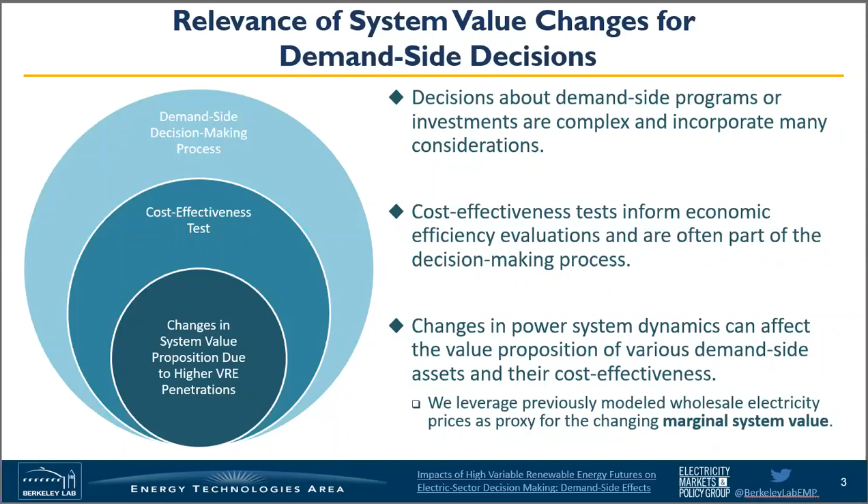And so we want to leverage our wholesale electricity price series as a proxy for marginal system value, and then see how growing levels of wind and solar change that marginal system value of various resources and what implications that then has about final investment decisions. The next slide is quite busy, a little complicated. It is a summary of the entire year 1 research. So I will not have time to go into detail here. You can look at the full technical report if you are interested in learning more about it.

But what we did was we looked at the year 2030, so only 10 years from now, and compared one scenario where we froze the wind and solar shares as they existed in the year 2016 and contrasted those with 3 high VRE scenarios. One that had a lot of wind, one that had a lot of solar, and one that was balanced with equal amounts of wind and solar. We looked at 4 different regions in the United States: the Southwest Power Pool, NYISO, an organized market in New York, CAISO in California, and ERCOT in Texas.

And while some of our findings varied quite a bit, depending on whether you're in a high solar or a high wind scenario, certain elements were similar in all 3 high VRE scenarios. On the one hand, we found that the average prices over the course of an entire year decrease with increasing renewable energy penetration, up to 40% in some instances. We also found that there is an increased frequency in those hours that have especially low electricity prices, under $5 or even $0. This was particularly true in ERCOT in Texas in the high solar scenario.

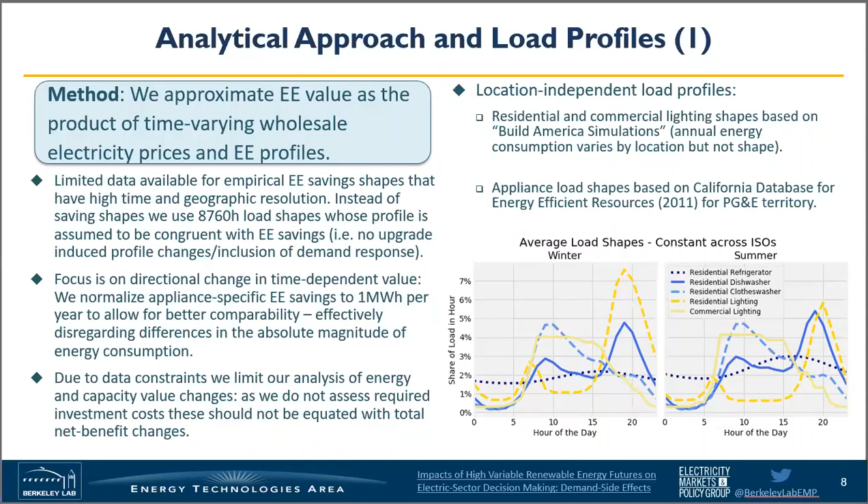We look at a couple of different measures. Here on the right side, I've shown some that we assume to be relatively constant throughout the country that do not vary by location. So we have residential refrigerator loads, dishwasher loads, clothes washer shapes, and residential lighting and commercial lighting shapes that we used from the California database for energy efficient resources and the Build America simulations.

Then we have some other energy efficiency measures that actually vary quite a bit depending on where you are in the country. And this is particularly true for HVAC loads that are driven by climatic differences. And so for each ISO, we use two candidate locations. In SPP, we are looking at Kansas City and Sioux Falls. In NYISO, we look at Buffalo and New York City. CAISO, we look at Bakersfield and San Francisco. And for ERCOT, we look at Dallas and El Paso. Now we know actually that El Paso is not part of ERCOT formally, but it is a nice representation of the climate system in the western parts of ERCOT, and thus we use it here.

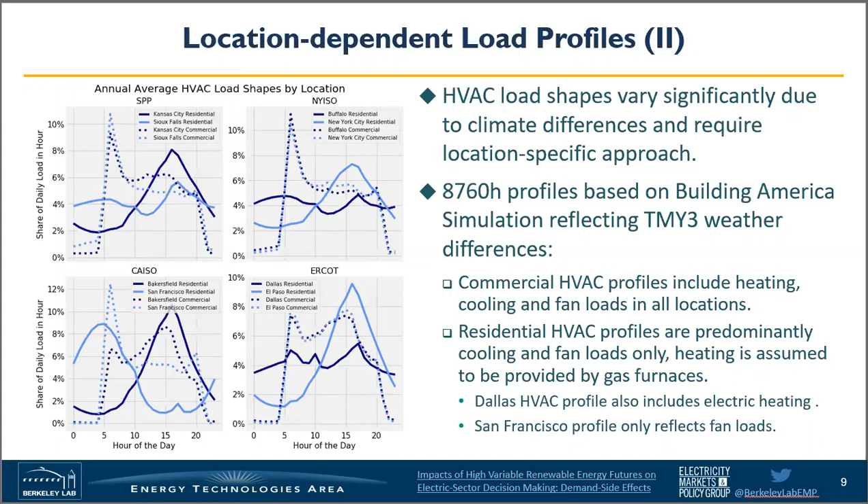So these are the underlying load shapes, which we assume to be EE saving shapes, and we will now combine them with the concurrent hourly energy and capacity values in order to then calculate the total energy efficiency value and see how those values change over the course of the year and between the different scenarios.

So slide number 10 now has a summary of that. This is quite a busy graph, so I want to orient you a little bit. We have our 4 ISOs, and then in the lines are the different measures. The x-axis is the total value in dollars per megawatt hour, so energy and capacity value.

And the red triangle represents the energy and capacity value in the low VRE scenario for a given measure in a given region. Now what you notice is that the other 3 dots, the yellow square that represents the high solar scenario, or the blue X that represents the high wind scenario, are often to the left of the red triangle, meaning that there is a decline in the total value of energy efficiency savings as defined by only energy and capacity value. So the total value declines, and that is actually strongly driven by a decline in the energy value component. Capacity value at times may even increase a little bit, but the energy value decreases are so large that the total value change is negative.

You will also notice that the magnitude of the value decline differs between both measures and regions. The value decline is the strongest in CAISO and in ERCOT, and there are some applications that see very little value change, for example, a residential dishwasher. And there are some others that see very big value declines, for example, commercial lighting in the high solar scenarios, where energy savings that occur during the middle of the day when electricity becomes relatively cheap because of high solar generation levels don't become as valuable anymore.

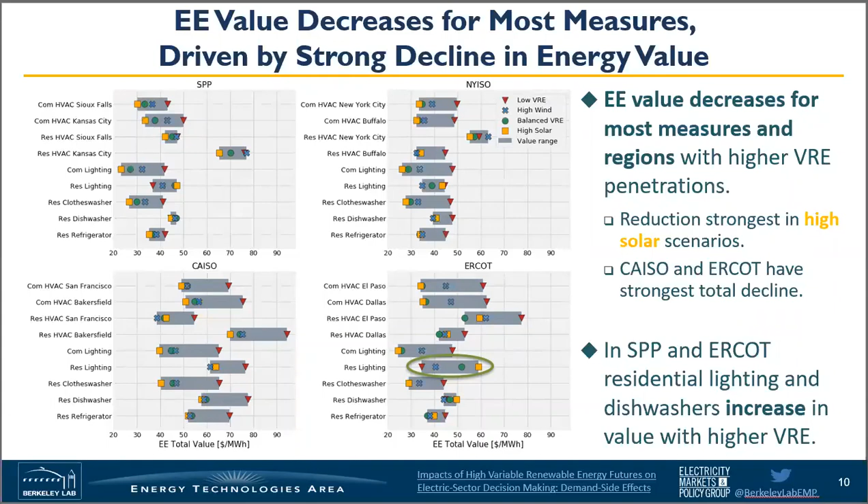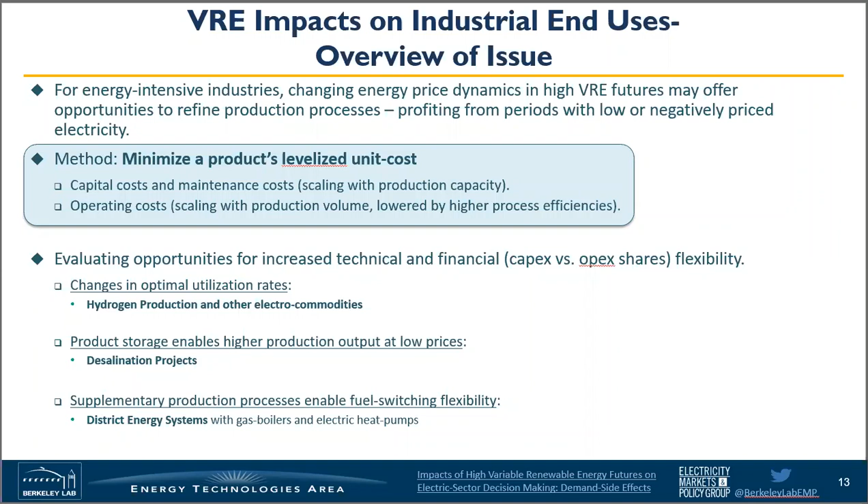So unfortunately, we won't be able to talk about that much here today, but I invite you to look at the report for more information. And with that, I want to now hand it over to Cody to talk us through the next set of examples. All right, thank you, Jo. Can we move on to slide 14, for those who are following along on the phone?

Thanks for highlighting some of the margins in which VRE price dynamics can affect decisions made by large energy consumers. Like Jo said, I'm going to talk in more detail about one of these margins, which is the opportunity for frequent periods of low electricity prices to affect how an end user trades off capital costs against operating costs. And so to address this first decision, we present a case study of power-to-hydrogen, which is currently a niche application due to high costs.

I'll note that while we study power-to-hydrogen specifically, we also generalize our results to other industrial commodities that require significant amounts of electricity, and those examples could include carbon fiber or desalinated water. And so what exactly do I mean by power-to-hydrogen? I suspect some of you may be familiar with the term, and it's an energy-intensive process in which an electric current is used to separate oxygen and hydrogen from water.

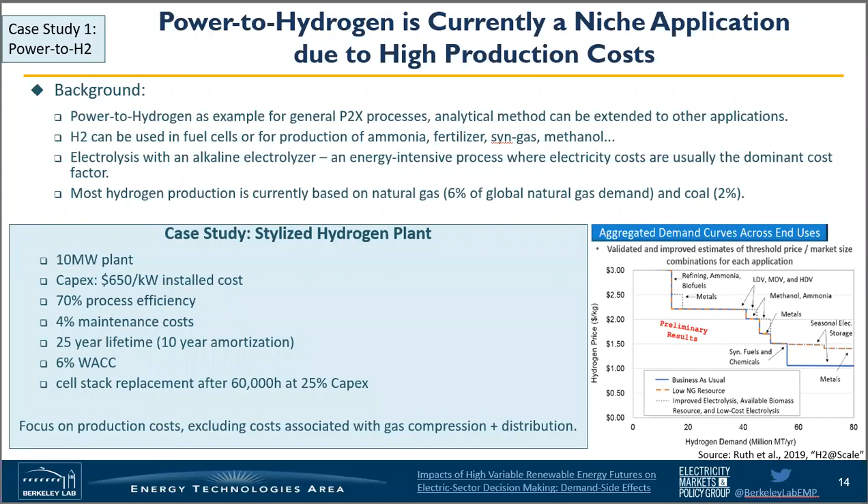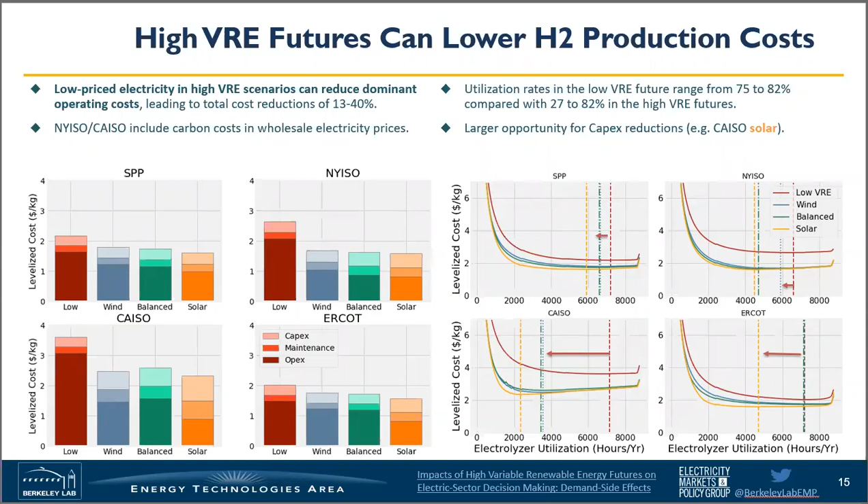And so I think an interesting takeaway here is that we see VRE price dynamics causing hydrogen producers to favor low capital cost technologies that are able to flexibly switch on and off. And now to slide 16.

And so while in the previous slide, we abstracted to an electro-commodity that might have different requirements for run times, now we're looking at, on this slide, how our results might change if we vary the upfront capital cost or the efficiency of a production process. And so this chart is a little complicated, but on the x-axis, we're looking at the upfront capital cost of the electro-commodity process, and then the upper and lower bounds of these red and green areas represent changes in the efficiency of the production process.

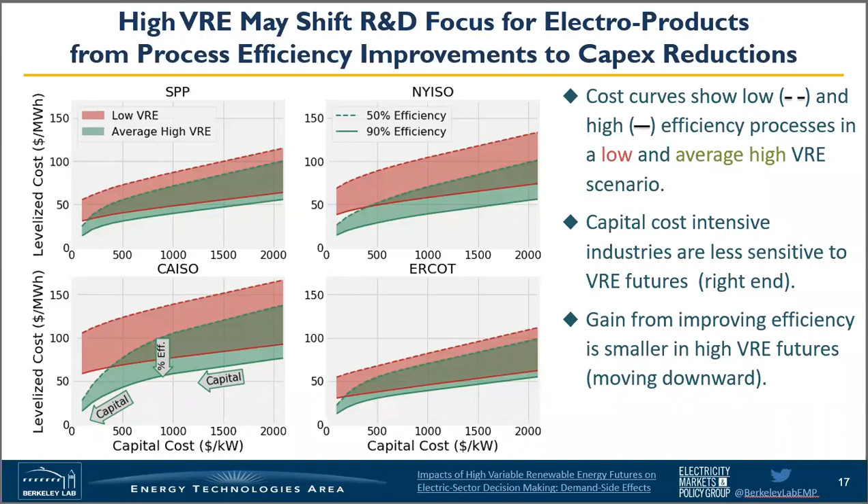All right, moving on to the next section, retail rate design. Now we're going to transition to our third long-lasting decision in the electricity sector, retail rate design. Okay, so in this context, we're going to ask, under different high VRE futures, how might regulated retail electricity rates further diverge from marginal cost and lead to market inefficiencies? And also, what new aspects should retail rate designers consider when drafting the next generation of rates?

And it's important to distinguish, as many of you know, that retail rate designers don't only think about electricity rates that are the most economically efficient. They also consider other worthy design principles like fairness, equity, simplicity, or customer acceptance of rates. And so really you can think of a rate design in terms of trade-offs between economic efficiency and other principles like simplicity.

And so a flat rate that provides the same rate per kilowatt-hour at all hours of the day might be really easy for a customer to understand and accept, but it might do a poor job of communicating the real-time constraints of the electric power system. And so on the other end of the spectrum are rates like time of use rates or real-time pricing, which are better approximations of system costs, but might be harder for customers to understand.

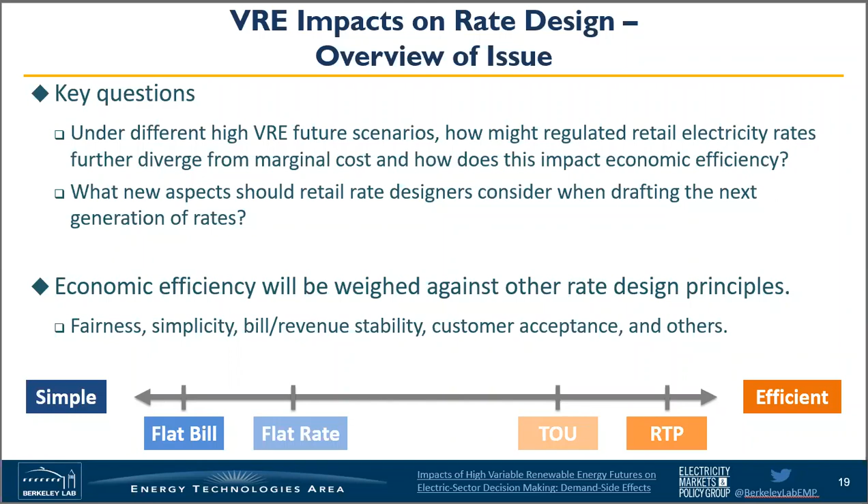And so really our analysis of retail rate design is going to investigate how this trade-off between simple rate structures and more complex rate structures could be more important in high VRE futures. Moving to the next slide.

So our approach here is that we're going to start in a low VRE future and derive characteristics of rate structures that produce the lowest level of economic loss or deadweight loss. And then we're going to take the characteristics of these rate structures that are optimized for a low VRE future and see how they perform in a high VRE future. And we hypothesize that they won't do very well due to these kind of different VRE price dynamics.

And then finally, in the third step, we'll re-optimize the rate structures for a high VRE future and make recommendations about rates that perform well or are efficient in high VRE futures. And so we're going to limit ourselves to just looking at 4 different rate structures here. In all 3 of these steps, we're going to look at a flat rate, and then we're also going to look at a time of use rate with 2 periods, and also a time of use rate with 3 periods. And then finally, we're going to also evaluate a critical peak pricing program that's combined with a 3-period time of use rate.

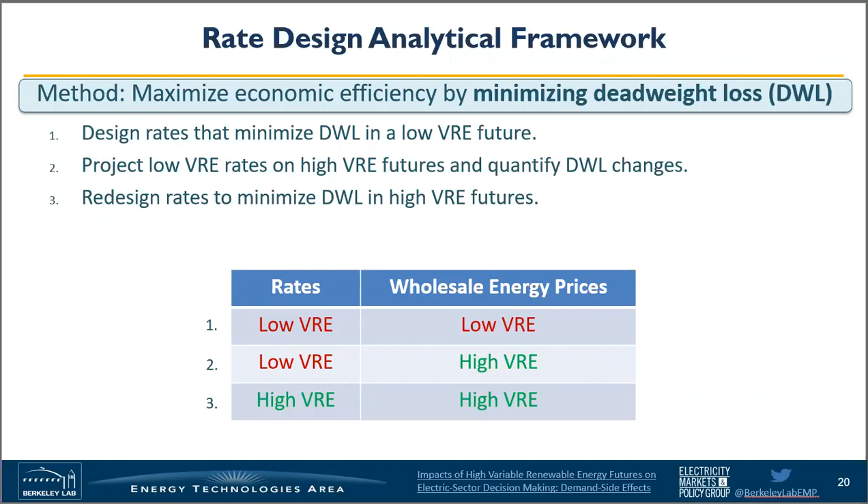So just briefly, if we want to evaluate economic efficiency of these rate structures, we need some mechanism to quantify how efficient a rate structure is. If you recall in the previous section about large energy consumers, we were using levelized costs to compare different scenarios. Here we'll be using deadweight loss to compare rate structures between scenarios.

And so deadweight loss is a function of how large the deviation in price signal is from the efficient price. And it's also a function of the slope of the customer's demand curve, which is determined by price elasticity. And so if customers are very sensitive to price changes, you'd expect to have a higher deadweight loss from these price deviations. And so just in general, throughout the rest of this section, I'll use deadweight loss interchangeably with economic inefficiency. Moving to the next slide.

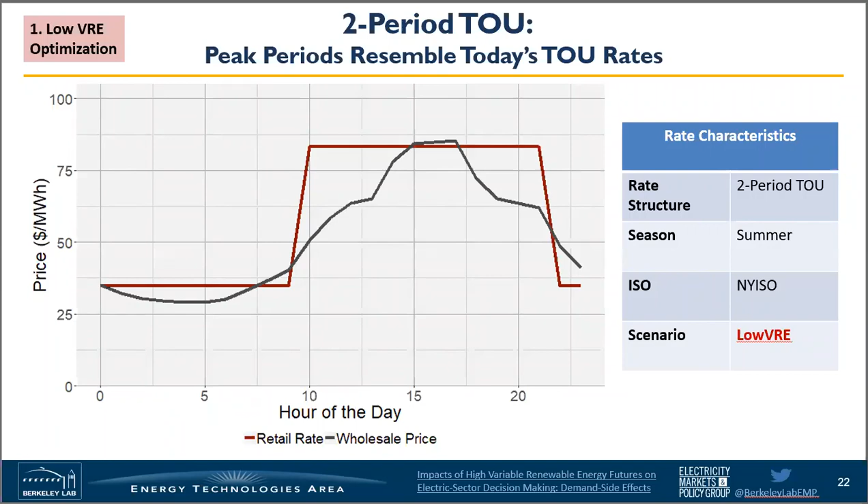And so just for context, if we summed up the deadweight loss across all megawatt hours of the year, we estimate there would be roughly $2 billion in economic losses in ERCOT if all customers were on a flat electricity rate. But this is a very rough approximation. Next slide.

higher penetration of renewables. And I'll point out that this inefficiency might be tolerated in a low VRE future, but perhaps not in a high VRE future as the magnitude of the loss increases. And I'll also note, like Yo had mentioned in the energy efficiency section, the losses are somewhat negligible in CAISO because CAISO's low VRE future already has significant VRE penetration associated with it. Next slide.

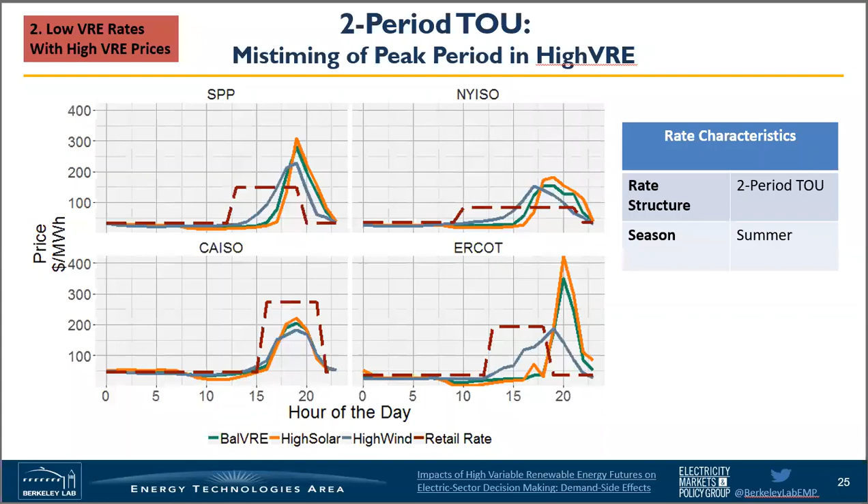But now you can see that the peak period shifts later in the day and becomes more pronounced with higher VRE penetrations. And again, in CAISO, in the bottom left there, a lot of this peak shifting has already occurred in the low VRE future. Next slide.

And so now, what modifications could be made to rates to maximize economic efficiency in high VRE futures? Well, one is greater use of 3-period time of use rates as opposed to 2-period rates, which are more common today. And so a 3-period time of use rate does a very good job of approximating the wholesale cost of electricity in a high solar future because the diurnal price profile is quite predictable.

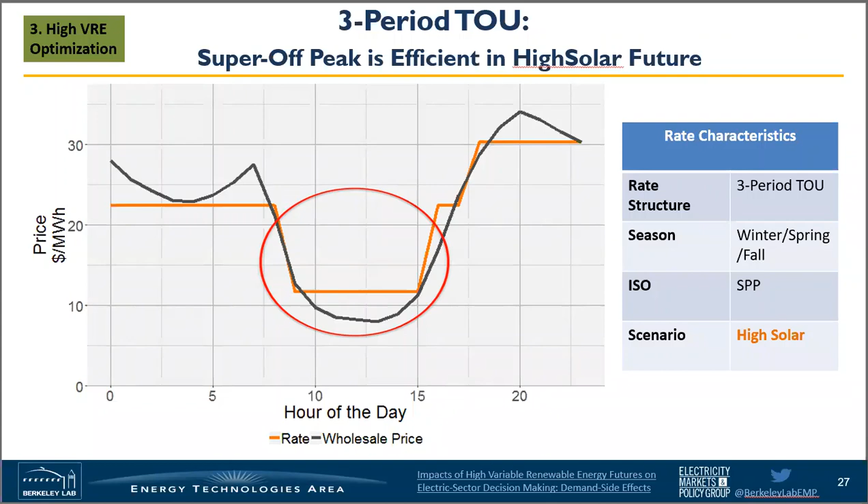And so this 3-period time of use rate, for example, could allow EV owners or hydrogen producers to better align their demand side decisions with times of the day when renewable generation could be facing curtailment. There are also other recommendations we make that are highlighted in the report, such as expanding use of critical peak pricing days, and I encourage you to look at the report in more detail for that. Next slide.

And I'll conclude by saying that a critical peak pricing program combined with the 3-period time of use rate can eliminate almost 100% of the deadweight loss associated with a flat rate. And so while many folks advocate for full-blown retail real-time pricing, a well-designed 3-period time of use rate combined with critical peak pricing can cover quite a bit of ground. All right, now I'll turn it over to Yo to wrap up and summarize the conclusions from our study.

Yeah, thank you, Cody. We're now on slide 29. So just to refresh some of the major conclusions that we had drawn in each of our 3 sections for these 3 representative demand side decisions. First, looking at energy efficiency and changes in value at times of peak demand, we found that our forward-looking scenario analyses that use these highly time-dependent valuation approaches, using 8,760 hours per year's values, can provide quite a number of insights about trade-offs between different resources, between the low VRE scenario and the high VRE scenario, but also between the high wind scenario and the high solar scenario.

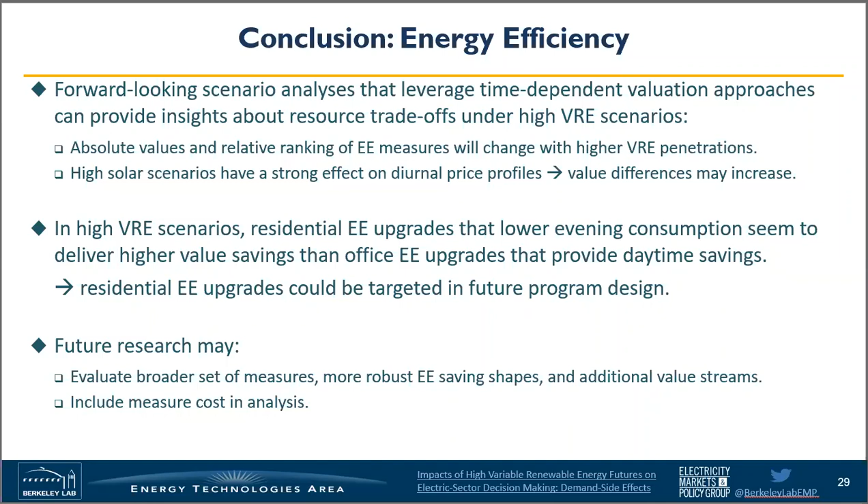Looking now at the opportunities for the very large energy consumers, we found that large consumers can benefit from the changing electricity price dynamics and the increased frequency of very low prices if they can access those wholesale electricity markets, and if they can substitute their electricity potentially for other energy inputs in their production processes.

Those that benefit the most from these new low electricity price periods are those that have, on the one hand, very energy intensive processes, so that currently the energy costs are high, or those that can effectively decouple some of their commodity production from energy demand by increasing intermediate or final product storage, and the report has more examples about that, or those that can invest in the capability to strategically switch between different fuels and electricity depending on the relative pricing, and make use of electricity during periods of low electricity prices.

So this, again, is an area ripe for future analysis. You may want to investigate how certain R&D investments that either reduce the capital cost of relevant equipment or that may yield higher process efficiencies compare with the actual costs that are associated with these R&D efforts. Or you may want to look a little closer at what potential is out there to use electricity for high temperature processes in industry. You may want to see how you can change other industrial production schedules to increase the flexibility in the electricity consumption to become more responsive to more dynamic electricity price environments.

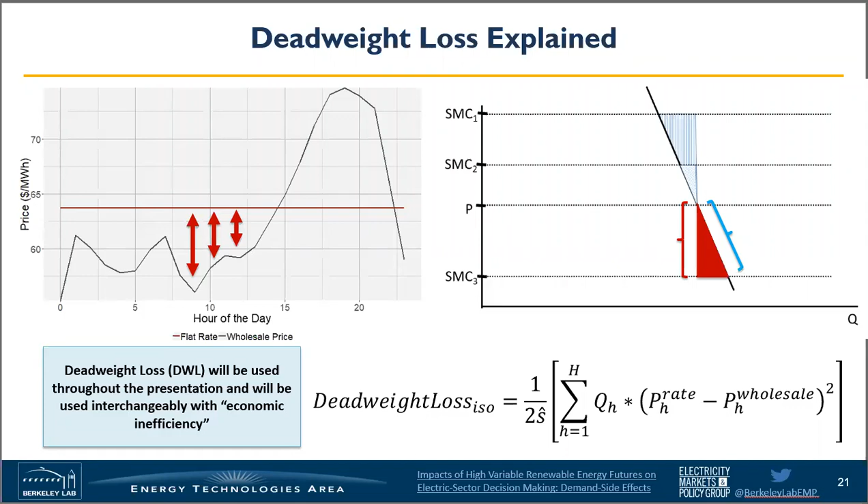But in the high VRE scenarios, in the case of ERCOT, which was the most dramatic in the high solar scenario, the optimal number of CPP event days went up to something like 40 event days, which is considerably higher. So I agree with that question that talked about the importance of the number of CPP event days, and we do find that you would need to expand the use of CPP event days in high VRE futures.

And quickly, why we didn't look at real-time pricing: I think there's a lot of studies already out there on how real-time pricing is the most efficient rate structure. And we did have to limit the number of rate structures we wanted to analyze. We chose CPP combined with time of use as our rate structure to analyze, because real-time pricing is really complicated for customers to understand, and we think a lot of the benefits of real-time pricing can be met with a three-period TOU with CPP.